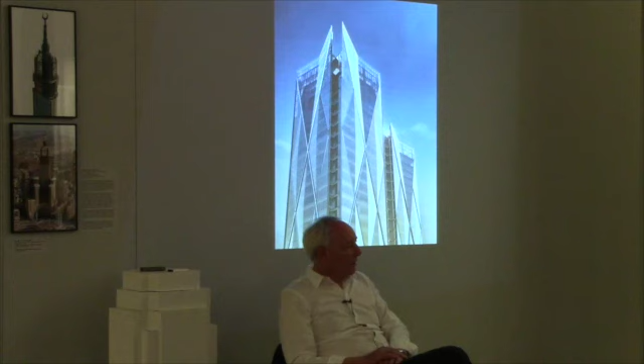When we started with just me, we were just doing bathroom extensions, as you do, that sort of thing, small projects, and it's gradually grown. So now there are 6 other shareholding directors, so there are 8 of us altogether, and about 200 people, mostly based in London, but we have an office in Hong Kong, which we're building up because we did quite a lot of work in China and the Far East. So that's the kind of background of WilkinsonEyre.

I thought I would just say a little bit more about the fact that all the projects are very different, and you will see this if you keep looking. This is because our approach to architecture is based on the specifics of the brief and the site. So we're very context based, and we don't have a formula, a style, if you like.

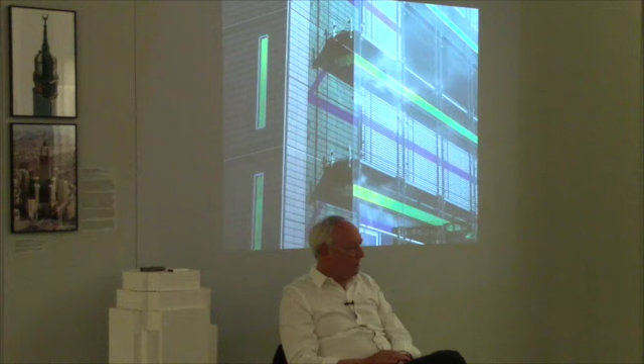We take each project as an opportunity to do something different, and we try to design appropriate buildings. So you'll see that there are bridges and commercial buildings mixed in with infrastructure projects.

And you'll also see some artworks here, which are my paintings. The reason I put those in is that I'm very keen on drawing and painting, it's very much a part of my life, and it affects the way I design buildings. So I like to put them in, I like to see them as part of the architecture.

There's one. Of course, they're not related, but actually the architecture influences the paintings rather than the other way around.

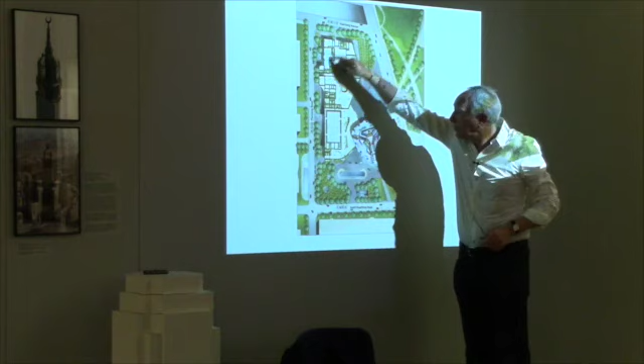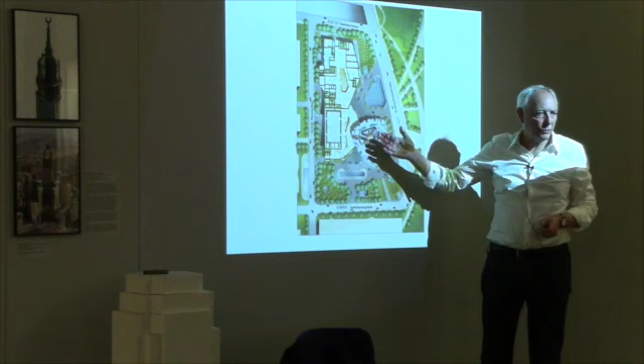It's 4.5 million square feet of accommodation, mixed accommodation. There's a tower in the centre, and there's a new underground route below the site with connections through into a shopping area here. This is actually a shopping mall, conference centre, and there's a service apartment building above here. So it's a mixed development with offices on the ground floor of the tower, about 1.5 million square feet of offices, and then a Four Seasons hotel above.

So it was an awful lot to do in a short period of time. You can see here how the tower is joined by a sort of glazed... well, actually this is the main shopping area, but this was a sort of public space which joined up all the activities. And you'll see here there's a helicopter landing pad on the roof.

And that was one of these smoke-filled rooms. One of the things in Guangzhou was everybody smoked. Everybody wore polo shirts. They all smoked and had two phones in their hands. So it's quite difficult smoking with two phones. And they were talking all the time on both phones. So, you know, the meetings were chaotic to say the least.

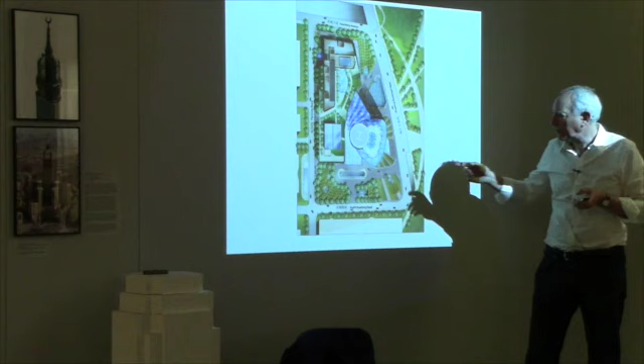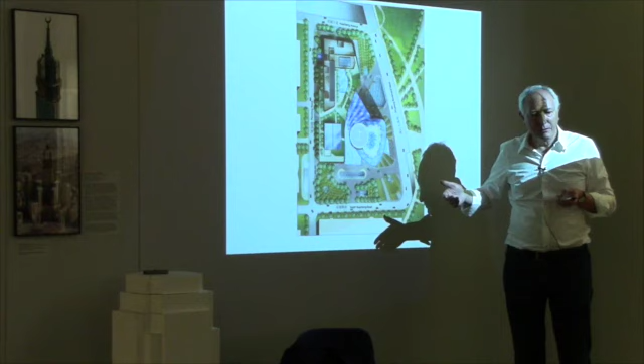But there was one meeting where the chief fire officer, who was quite an attractive woman in her mid-30s I would say, in uniform, was demanding what she wanted. One of the things she said was we had to have escape from the top and the bottom of the building, which meant, so we said, well, the only way we can do that is to put a helicopter landing pad on the roof. She said, yes, that's what I want.

So we said, well, what sort of helicopter do you have? Because it makes a difference. She said, we don't have any helicopters. But we'll get one. Anyway, she got her own way. And that meant there's no spire.

So working through, this was a very early drawing in my sketchbook, not beautiful, I'm not going to be published, but it was just a meeting we had with the engineers deciding how we were going to provide the structure. And we went for a diagrid structure, which is very stiff.

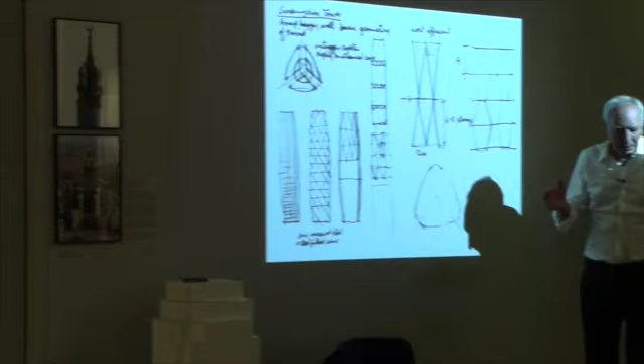The reason for that is, with an expensive hotel at the top, we were informed that people don't like to lie in bed when the building is moving around like this, because towers do move and it can be disconcerting.

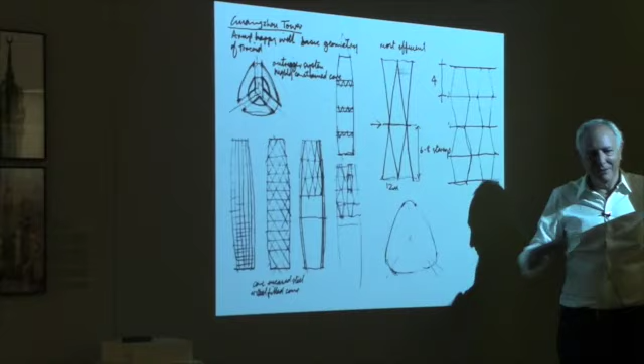So we got a very stiff structure, and I stayed on the 93rd floor when I was last there, and it was absolutely static. I couldn't feel any movement. I slept very well, so it worked.

You can see here that there were complications which came out of the simplicity. We wanted a building which was elegantly simple, and that's how we achieved it. It's actually a very big floor plate, but because it's so tall, it seems very slender, and we tried to get this sort of elegant simplicity.

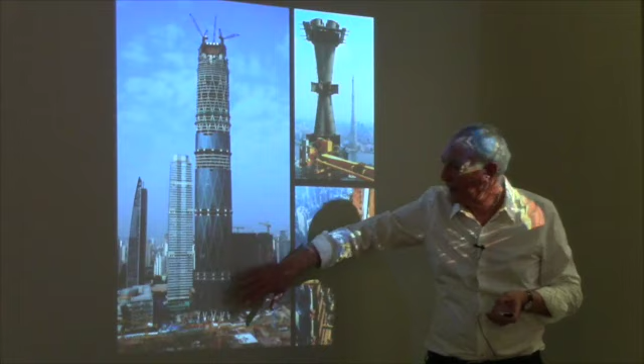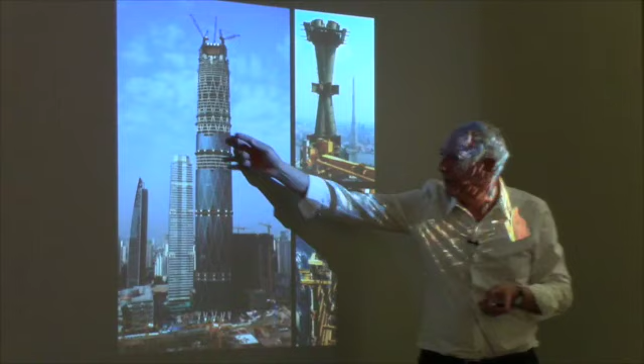So it's a triangular form, a curved triangle, and each facade has a radius designed to 5.1 kilometers, which was done visually and in modelling rather than deciding we would go for 5.1 kilometres. It's fattest down in the lower third and gets thinner as it goes up, where the hotel is, so you don't need so much depth, because you've got 1.5 million square feet of office in this space.

Just to look at the section, the lift core is enormous, although it's actually quite an efficient plan. There are 71 lifts in the building, which is something we couldn't imagine, but actually a lot of buildings have more than that. Because it's a mixed development, a lot of them share the same shafts.

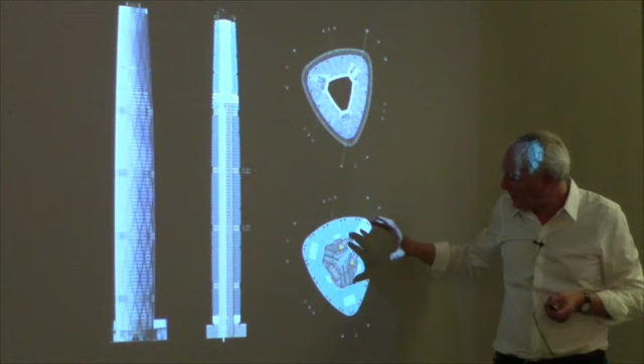So we had 6 high-speed, 9 high-speed double-decker lifts that go right up, and they stop off on these floors, and you change onto others. You all know about these things, but we didn't know a lot about this kind of thing, and we spent months getting this core as tight as we could.

And then, of course, on the upper level where the hotel is, the 70th floor is the reception area, and we have an open atrium.

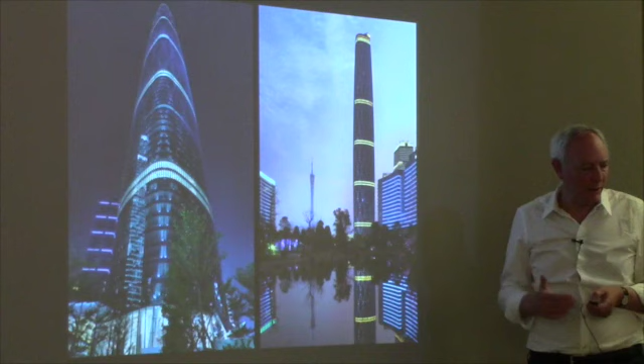So this is the building at night, and it's not exactly how we would have done the lighting, but there's a Chinese approach to lighting that's quite different. They like bright lights, and they like to light up the whole tower at night.

And this is the atrium I was talking about. The top 8 floors are glazed in for smoke reasons, and we made that into a sort of kaleidoscope so that we could collect the light and bring it down into the space. Then it's just an open atrium, with access to all the rooms at the lower level.

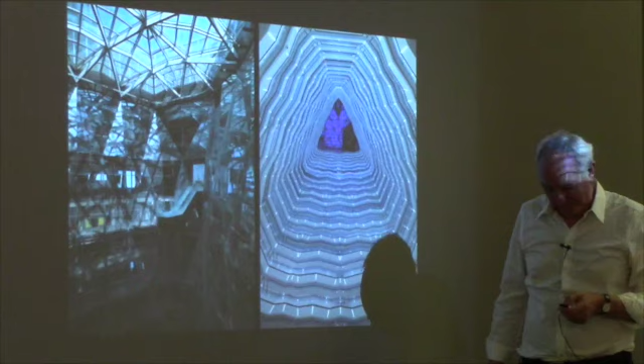And when you get down a little bit lower, there are 3 or 4 levels of restaurants and bars and those sorts of things that go in hotels, and then there are another 2 or 3 floors at the top of restaurants and bars. So it's very well serviced, and it's an exciting place because that atrium, 35 stories, is the same height as St Paul's Cathedral, including the dome.

So there's some room at the front if you'd like to come around. I don't know what the equivalent is in New York, but St Paul's always seems quite a tall building in London.

The 70th floor is open right across its face, so the lobby area opens out, and you've got these incredible views.

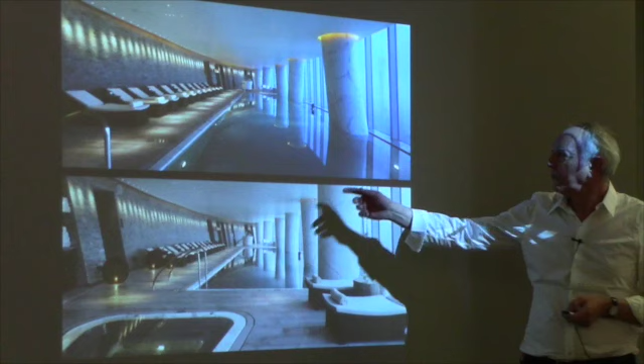And then, of course, there are all the other things like the swimming pool with a kind of infinity edge. But you're up on the 68th floor, I think. No, it must be the 73rd floor. Yep.

And that was our first tower, this sort of elegant simplicity, and it's been successful. They've let all the office space, and it's multi-let. It's a very typical Chinese way of doing things, where people take quite small sections of the plan, and it was all let very quickly.

And then the hotel, they're very happy with it. I saw one of the main board directors, the same person who said they've got to get rid of the columns in the rooms. They didn't want these big columns in the room, and I said, well, the building will fall down if you take the columns away. He now says people like the columns in their room. So they've adopted the columns because they're about 2 meters in diameter, so they're quite significant, having a big column in your room.

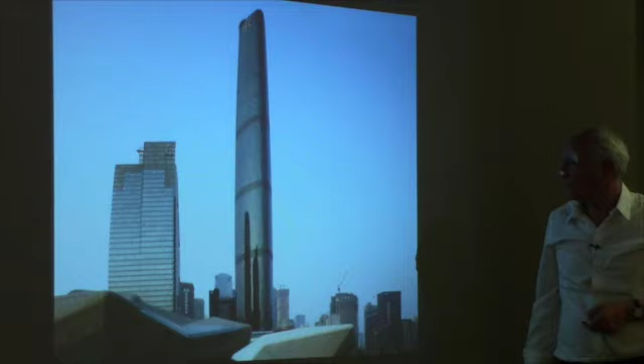Having done one tower, it's an entree to the club in a way, and that's what we thought anyway. It did get us on the list of various other tower competitions, but we didn't win, of course, because we were up against all the professional tower architects, except when we got to Crown Sydney.

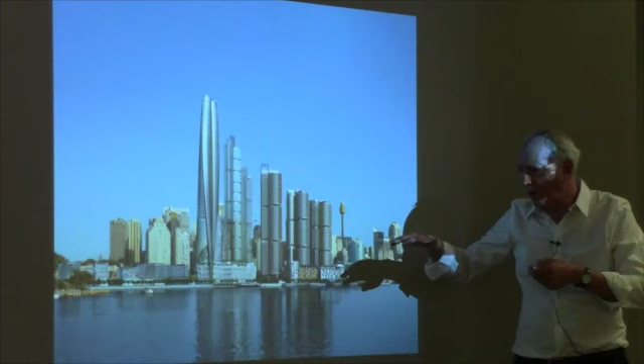Sydney is the main CBD behind here, and the city is sort of spread out a long way, but all the towers are in one main area. There are limits to how high you can go, which is 250 metres, and there's a line beyond here which is the Opera House - we weren't allowed to build beyond that. So this was a whole new redevelopment area. It was a container port before, a big slab of concrete.

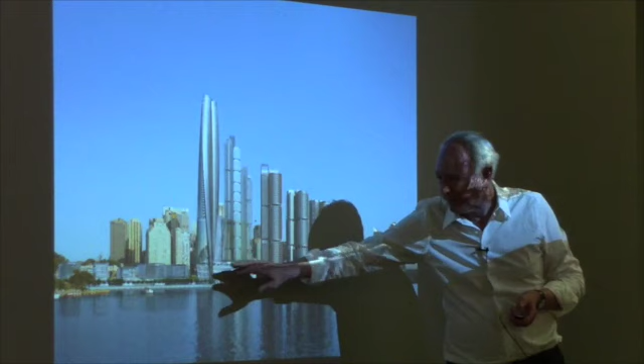Some years ago, Lend-Lease won the competition to develop it, master plan and develop it, and they had Richard Rogers Architects as the master planners. They're building these 3 buildings, and Renzo Piano is building these 2 buildings. We had to compete for this site, which was, in my opinion, the best site in Sydney.

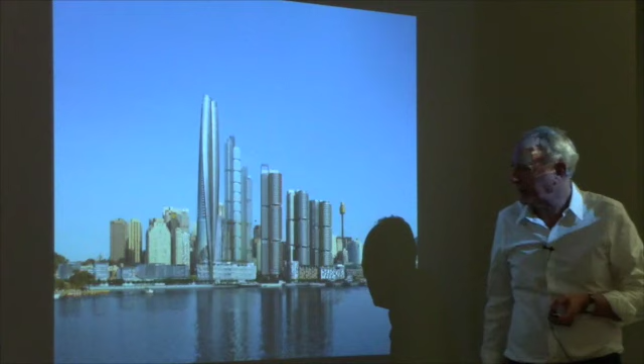You can see it goes higher than 250 metres. We were encouraged to push the limits, and we've gone up to 275, which is the maximum we can, which is about 70 floors. But it's a resort hotel with upper level apartments, very high quality apartments. And there's a big podium which has a casino and lots of - it's a resort hotel, so there are swimming pools everywhere, and there are bars and very expensive restaurants.

Being an international competition, one has to come up with something new. I mean, you can't win this sort of competition by throwing up a straight up and down tower. The brief came out actually on the last day before Christmas, and I grabbed this old wad of information, took it back, which was a nightmare really, because one likes to relax over Christmas. But there I was working through the brief.

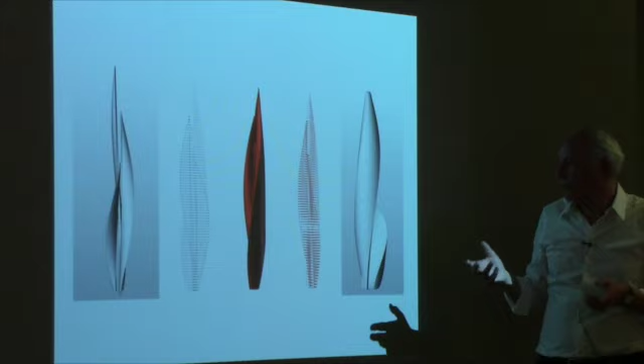So, starting with those sketches, we then started modelling it in 3D. And even just the first few models, the images coming from the model looked very exciting. I was really excited - I thought we were onto something here, so we went with it.

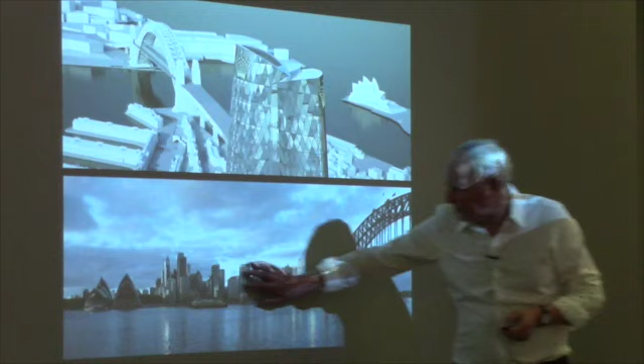And it's just placing it in Sydney. So you can see here the CBD, the Opera House, and the bridge, and this is the tall building. There are other buildings - we haven't shown those other buildings here. So it's a sort of high point, a landmark, if you like, in the corner. And the top of the building becomes really important - you can see here the 3 petals, how they finish at the top.

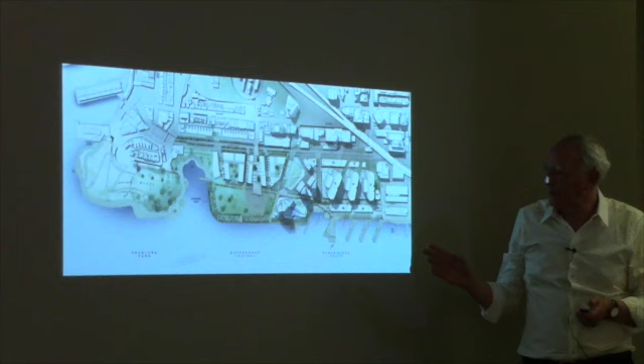Looking at the site, as I explained, this was just a big slab of concrete as a container port. Part of the brief was that 50% of the area of the whole site would be devoted to leisure activities and open space. The landscape architects and master planners - not us - resculptured the edge of this slab of concrete to bring it back to the way it was before, with the little creek.

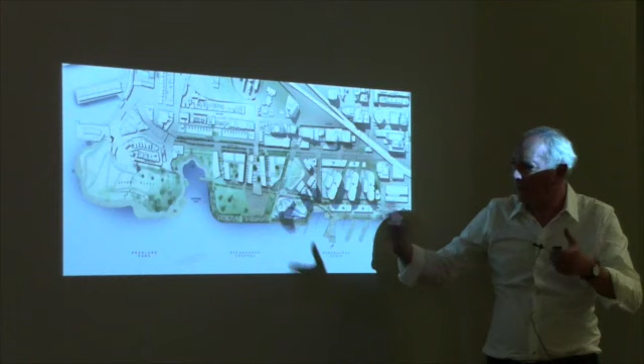And this is our site here, and these lines are the Richard Rogers master plan lines of how the development could take place - they're like fingers of high-rise development.

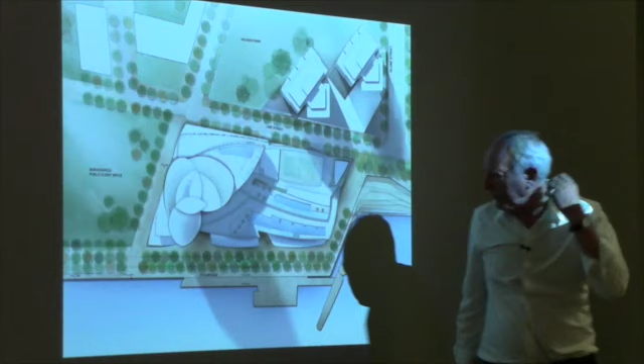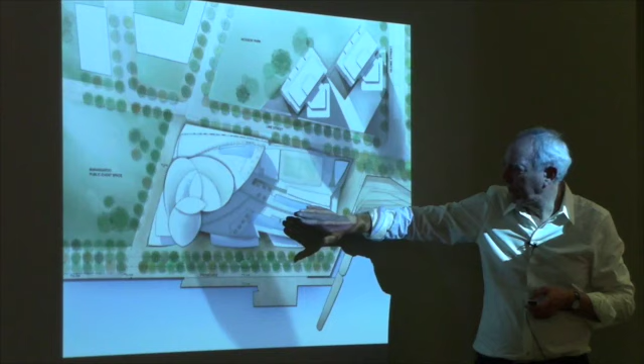Looking down on our building, you can begin to see how that piece of sculpture is really an inhabited sculpture. The 3 petals here, and a 4th petal is this one, which tails off to become the main hotel accommodation. This is the whole podium, which has these leisure activities at the top, with the casinos below.

And that's how it fits in. I don't know if you can see, it's not very good quality reproduction, but it is actually a very sculptural form, and it's twisting through 70 degrees.

At the lower level, we're on the waterfront, so these are some of the most expensive restaurants in Sydney. We must have spent weeks and months talking to the local authorities to convince them we could have these terraces onto the waterfront. They didn't want anything like that. Well, how can you not use the waterfront? Because our site boundary is this line here, and we had to take over the waterfront to get these cafes and restaurants and bars. So half of the space is open to the general public.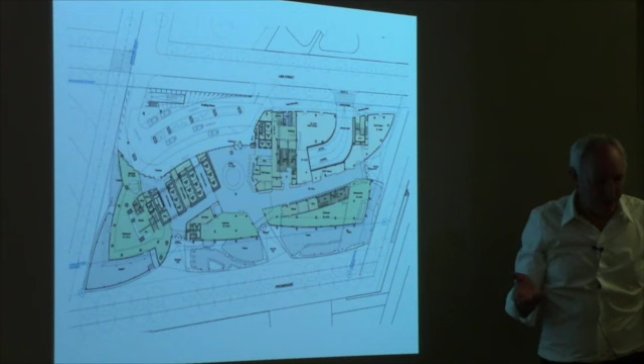The other half is rather expensive restaurants. But the whole thing about this hotel is there's no back to it. It's the main porte cochere, the entrance here. Every part of it has activities facing onto the street or onto the park on the waterfront. And you can go in, there are lots of different entrances, it's very porous. It was through ideas like this, which we developed in London, that we managed to convince the authorities that we could go ahead with such a big development.

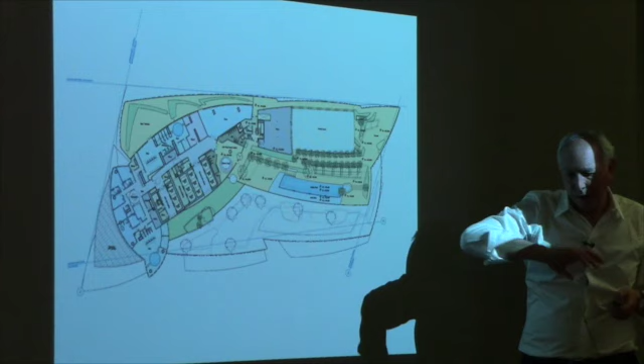And then as it goes up, the building changes, because it's not just reducing in size, it's twisting as well. This is the main hotel accommodation. There are a little over 20 floors of rooms, and they're fairly standard because we had a maximum and minimum size to work to.

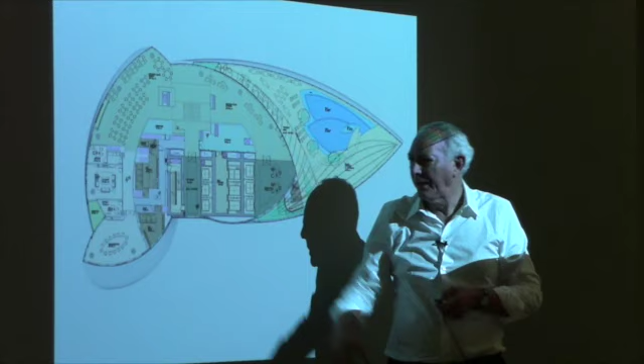And then that hotel part tails off with what they call the Crystal Club, which is the high rollers side of the hotel, for the people that come back every time. They get special facilities, and their own swimming pool at this level on the 24th floor with fantastic views.

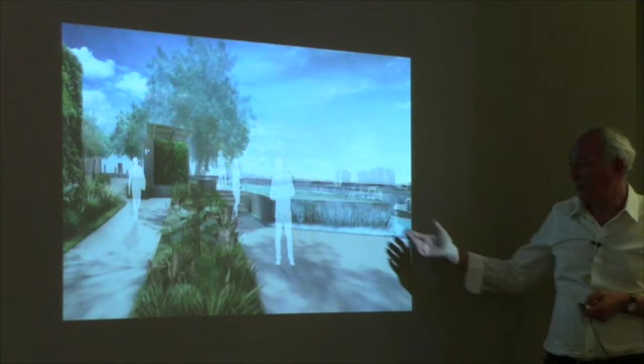This is the sort of design for one of the resort areas. And then as you go up, the building is changing, so every floor is different. And that can only work with the columns following the form.

It's quite complicated. I'm not sure there's ever been anything done quite like this, but there were some risks attached to this. When I talked to our client and explained what the risks were, they said, that's no problem, we're gamblers, that's what our job is, we take risks all the time, but I like it, and I'm prepared to take the risk.

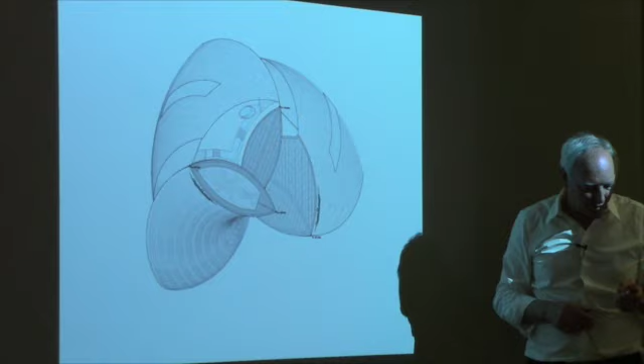So they've backed us all the way, and we've got no curved glass here, it's all flat glass. The only thing is it's going to be cold pressed into position, which we're reliably informed by various people is possible. So we're moving forward on that.

And the top 3 floors are pretty spectacular. I think they'll be the most expensive piece of real estate in Australia. We're talking sort of at least $100 million. Pretty nice place to live.

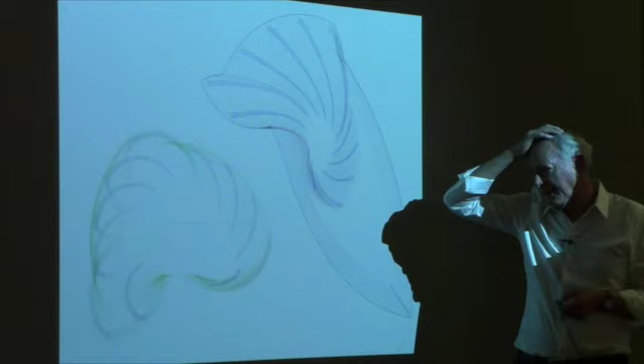And this is just an indication of the columns. They're not straight in any means, but this is the pattern they're following. And the core is vertical, so the core is providing the stability. It's got outriggers, but the outer columns take the curve.

And then on one side of the building, where we have more curvature, we've triangulated it, so that means we can do it without any curved glass. On the other side, we have a stepped system to take up the curvature. So it's floor to floor pane of glass, different lengths, so that we can get our solid panels where the partitions come across, so we can always accommodate the partition wherever it comes. These are kind of technical issues, but you can imagine that when you've got a building curving that way and going round and twisting, it creates a whole load of problems that you can't initially foresee.

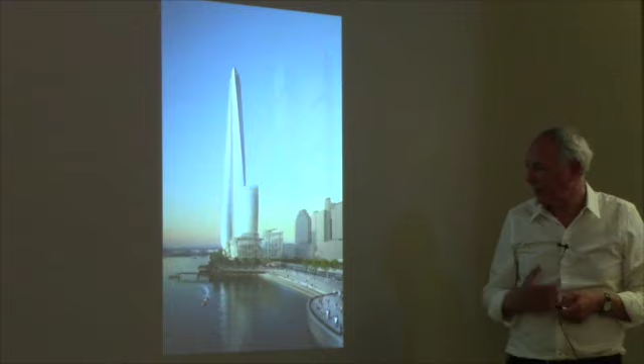So we have to solve those problems, and we've got past that stage now, we're on to tendering packages. And that's the view from the city of this kind of sculpture. What I called it in the interview, I called it an inhabited artwork, and they seem to be interested in that.

Then the question came up, and they said, well, it's a 6-star hotel, you can't just have glass, you've got to have some expensive materials. So for the podium, I said, well, I'll think about it. And I sent this sketch through to the client, which says laser cut white marble. And a note came back saying, yes, we like it. It looks expensive. It certainly will be.

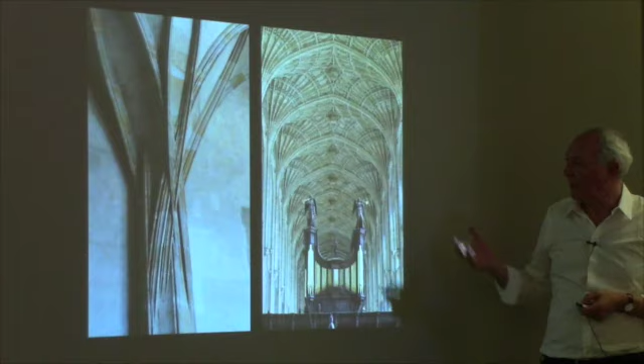It's going to be the only stone tracery, really the only Gothic stone tracery in Australia, and it can only be done in a very high-tech way. This is working again with Arup Australia, using an idea that Peter Rice had for tensioning up stone. You CNC cut the marble, Carrara marble, with a hole through it, and tension it up so the whole thing is held together. It's pretty new, fairly scary, but we got this full-size mock-up made, and when I was last in Australia they erected it for us, and it's pretty fantastic.

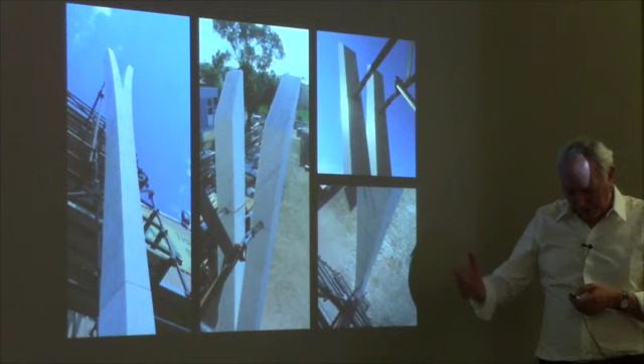This is how the CNC cutting of the stone elements works. In the old days, you wonder how on earth they could have made stone traceries with hammer and chisel. But this is how we're doing it, and these are the points where the steel tension was going—it's pretty exciting. I've not seen a client so excited, apart from the fact that we're a bit worried about the cost of it.

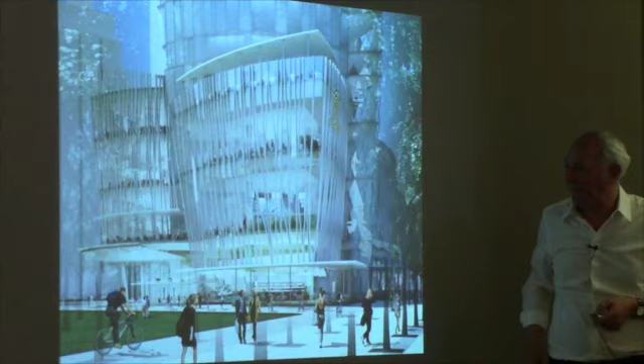But this is what you get: a veil, what we call a veil. They're mostly terraces around the building, and there's this marble veil, which is not regular—it's kind of slightly informal. There are repetitions, but it's an informal stone veil, and it gives it a particular sort of character and identity, which is what we want.

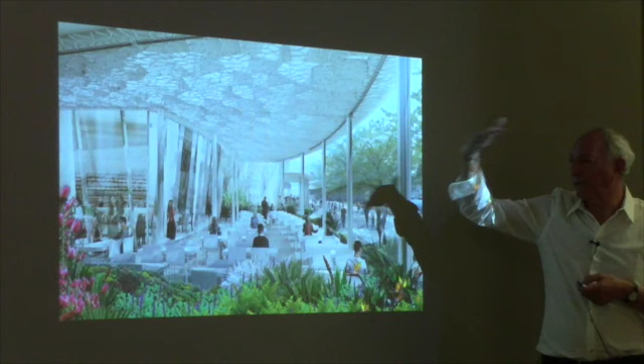And then there are the cafes on the waterfront I talked about. We've got a pretty unusual system for the roofs of those, using a Voronoi geometry with a glazed top and a variety of different underneath surfaces to provide the different kinds of space that we have. But it's still pretty exciting.

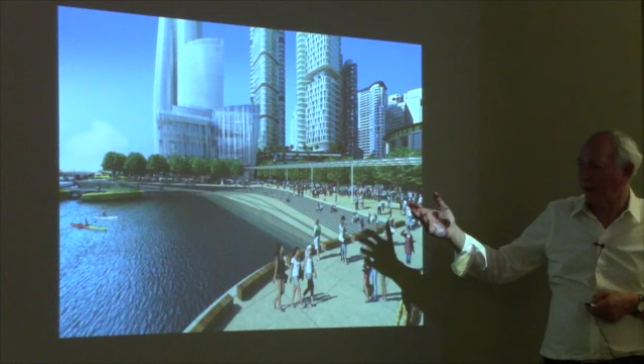And we finish there. I'm just going to have a quick drink before I move on to the next one.

So how are we doing? Have I got to speed up? A little bit. Yeah, okay.

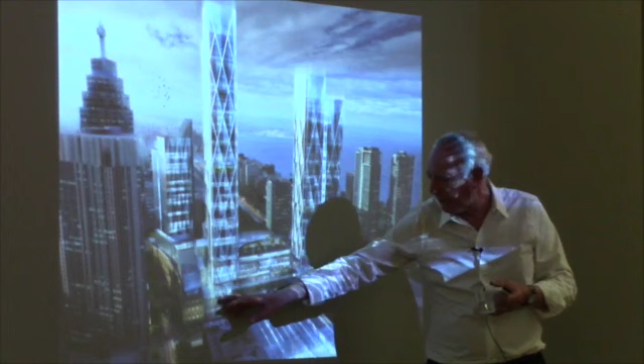So there was a very good opportunity to jump over this barrier, because this is Bay Street, and Bay Street is the main financial street in Toronto. So it seemed perfectly natural to us that you could build over the railway and put a block on either side, making that connection through to the main CBD. People coming down Bay Street could easily go up over the railway or under it. We make connections both ways, with cafes and restaurants on either side. It seemed perfectly reasonable to us, and that's what the client wants to do.

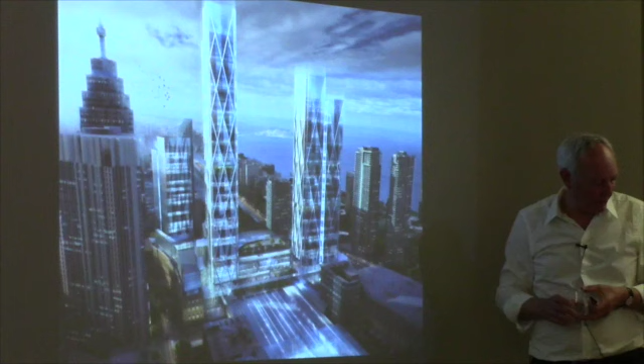So here, they said they didn't want any curves or anything complicated. It has to be a very simple building, but they want something special. Now, for an architect, it's like having your hands held behind your back, but it's still possible.

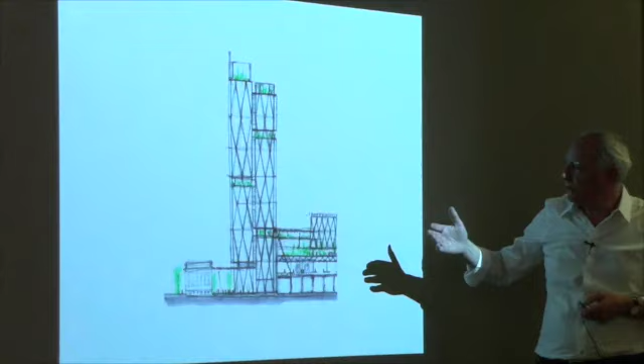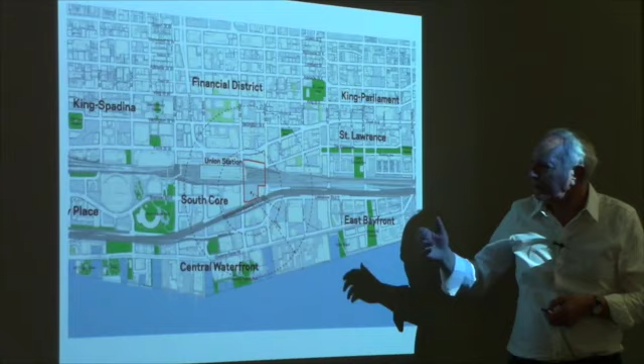So we came up with this idea—it's a sort of triangulated system. It's not quite like the first building I showed; it's not structural, but it's a triangulated cladding system, pyramidal. This is the sort of sketch of the triangulations, and the model showing how it's fairly simple glazing, but it catches the light in an interesting way.

So the whole point of these: when you angle a plane of glass, and if you have different angles, each facet will catch the light in a different way. And you'll see this from all over the city, so it's not just a one-off thing. Wherever the sun is, it's going to catch the glass, and it lightens the whole place up, giving it a very special look.

And it didn't take us much to convince the client of this, just making the model and shining the light on it. So that's part of it. It's more complicated, let's face it—you've got facets you have to deal with. But what you're getting back is something special, and it's a building which they can let.

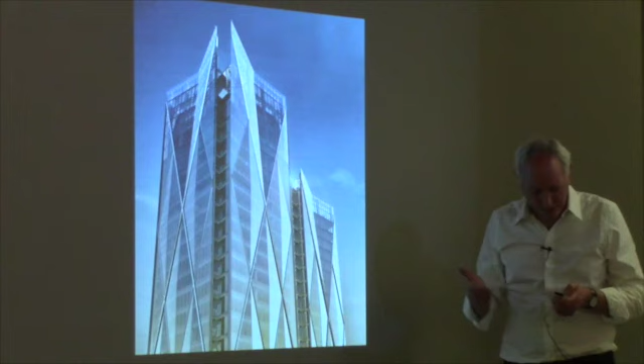They're looking for a big bank to take it.

There's this point about where architecture can actually pay for itself by giving something a little bit different. You make it special, and therefore you can get more rental, and you're more likely to let it. So that's the way we were working.

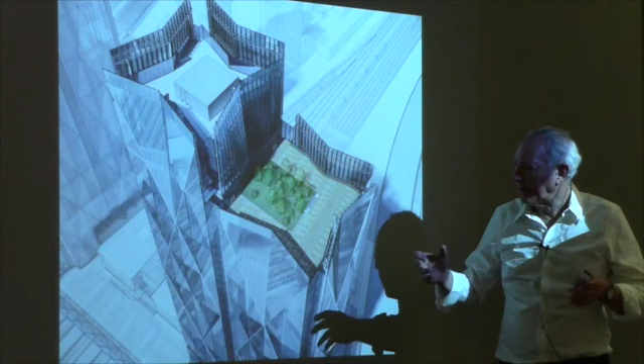At the top, we've had a lot of schemes for the top, and it's been kind of softened down a bit. We still have this kind of crenellated space at the top, and part of it is plant, and part of it is accessible, sort of high-level meeting rooms and so on.

And then, of course, at the lower level, we were trying to provide a good entrance lobby and attracting people. Remember, we've got to get people from underneath the railway or over the top of the railway to this space, and they can come in at the high level or the low level.

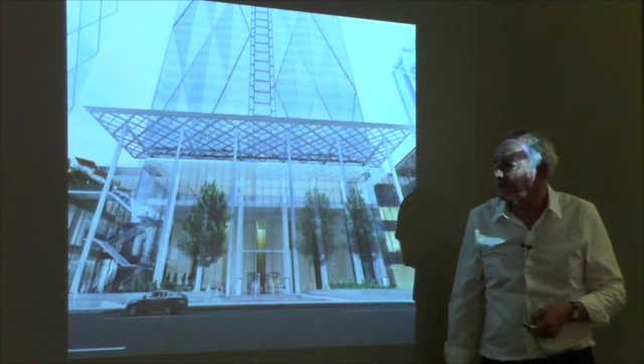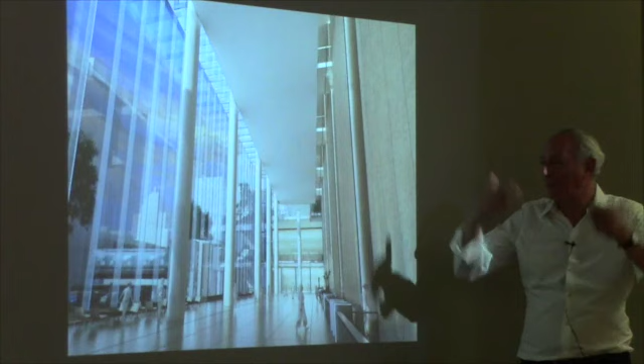And the process has been going on. It takes a long time. Everything has to be reviewed in several countries and costed. And it's the whole process, but it's going well. And that's what keeps everyone going. I mean, quite often you've got to cut something, you've got to make it simpler, and then they come back and say, no, we're going with it, we're staying with it, we're going to spend the money.

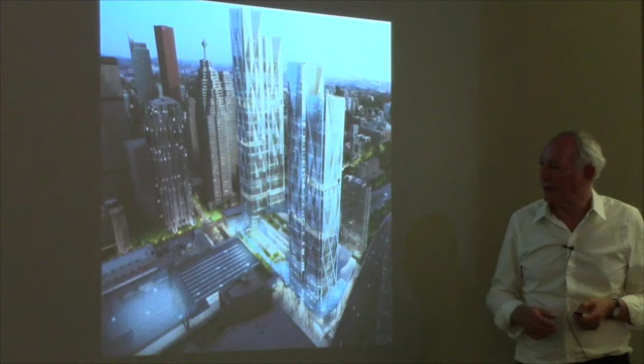Because they want this sparkling look. And actually the rest of the city is fairly, the best towers are the Mies van der Rohe towers there, and they're black glass and black bronze, but the rest of them are fairly ordinary and fairly simple.

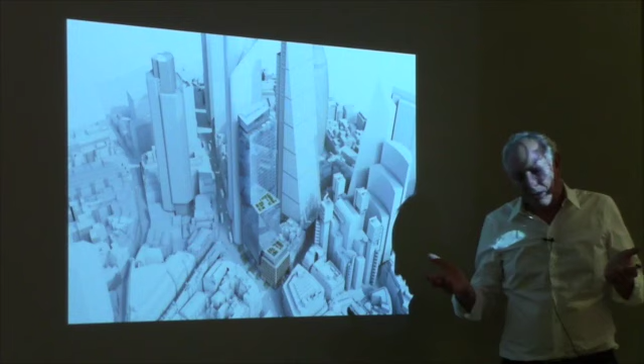So just going on to our last one, which is in my hometown, London. And London is probably the most difficult place in the world to build because we have incredibly difficult planning constraints. And it's mainly because it's a historic city, and some of these buildings in the centre of the city actually go back hundreds of years, and the planning process has sort of developed over the years. So it's very difficult to build anything, actually.

But when something gets built, like this is the Rogers Stirk Harbour cheese grater, it's called. They had no end of trouble building this. It took years to get the consent, but now they got the consent, they built it. We then had to fit in to this, so we couldn't actually block any views of the cheese grater, believe it or not, even though they fought tooth and nail not to build this. Once it was built, they said, right, you can't build, you mustn't have a building that goes into this space, into the triangle space.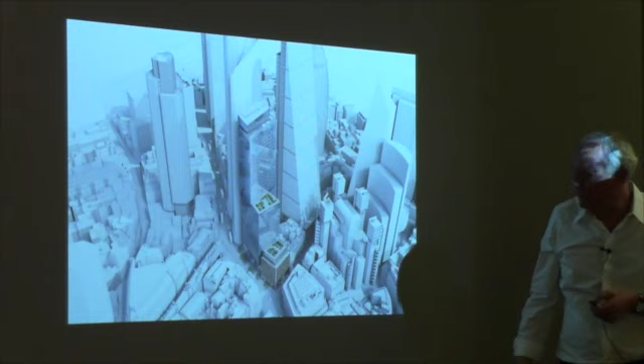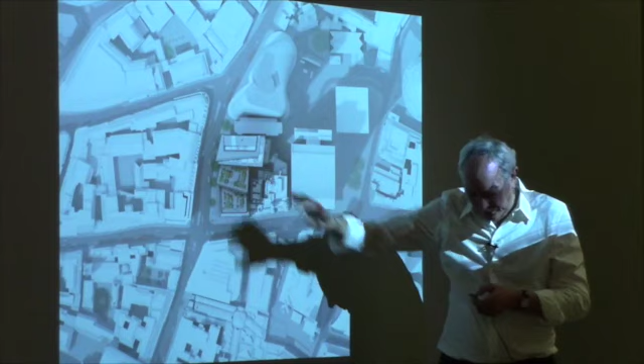So what happens is you work through a series. I think we had 6 or 8 meetings with the chief planning officer, just talking about what we could do and how far we could push it, what we couldn't do, and being slapped on the wrist each time. And gradually we got what we think is the maximum we could get out of the site, with a tower which is long and thin here, which sits on, they're stacked, so it sits on another tower.

And at the lower levels you get a bigger open space, which can be divided. We've got two entrances, one on Leadenhall Street and one on Bishopsgate. You wouldn't know Leadenhall Street is the insurance market for the world. Lloyd's is just here. So you can always let the space to insurance brokers, but they're lazy, they don't like walking very far. So you have to be within 5 minutes walk of Lloyd's. All the insurance companies are within 5 minutes walk of Lloyd's, so they won't go any further along. And so they have to have an entrance here, and then you have to have brokers' lounges for them.

They have these spaces where they chat to each other. That's what they say they're working, but it looks to me like they're just sort of resting. And it's quite complicated.

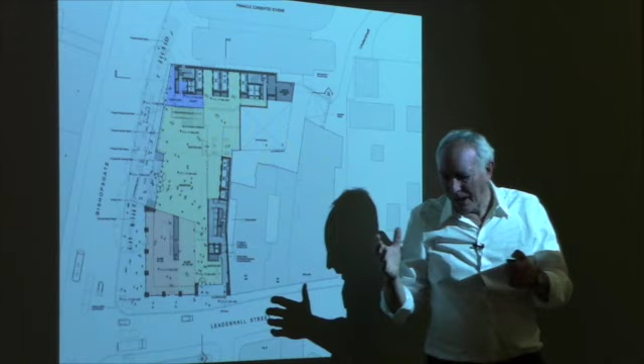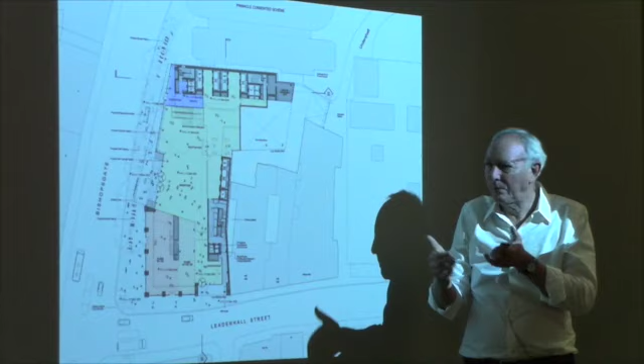But we're also reckoning that when the tower is narrow, the top part of it, actually this will be let to hedge fund managers and people like that. So the rental you can get for a small floor high up in the centre of London is phenomenal. We're talking possibly £200 a square foot, just because they don't want a lot of space, but they're prepared to pay anything for the right space.

Obviously, the brokers won't pay that. They have bigger spaces. So in some ways, having a building which isn't just straight up and down is actually a benefit. Well, that's the way it seems to be working out. Our clients at Mitsubishi do a lot of research, and that's the way they're feeling about it.

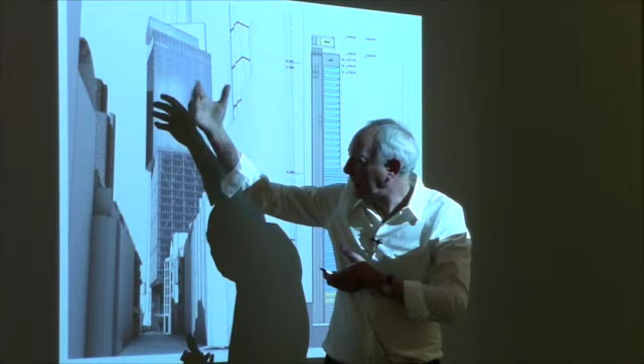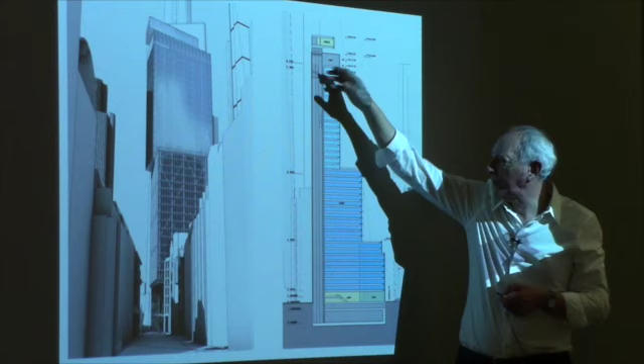So this is how it works, with one building sort of stacked on another building which has a much larger floor plate, and it gets bigger at the lower level. This can all be let to one place. It's a side core because we have another building along the side, so there's no view on this side, so we've made it a side core, and it steps out. And where it steps, you get very nice terraces overlooking St Paul's Cathedral.

We tried to make each stack different. The upper level stack is a 3 metre wide cladding system, and it's clear, triple glazed, so it can have clear glass, and it's very crystalline. The next stack has a much closer spacing, a 1.5 metre module, which is 5 foot in your terms, and the structure is expressed. Then on the lower bit on the corner, it's a stone cladding to tie in with the historic buildings here.

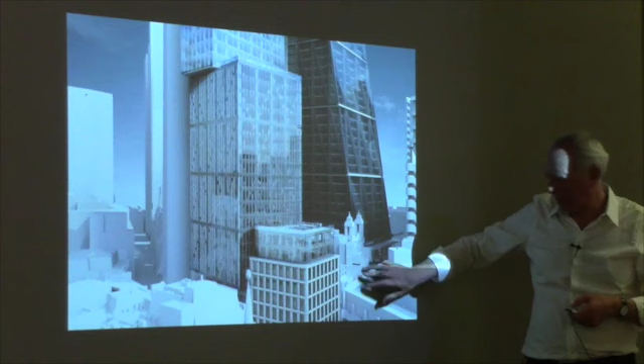So this is the Cheese Grater. This is what's known as the Pinnacle, which is being redesigned at the moment. That was the KPF building originally designed, and we have to somehow fit in between these two buildings on the corner.

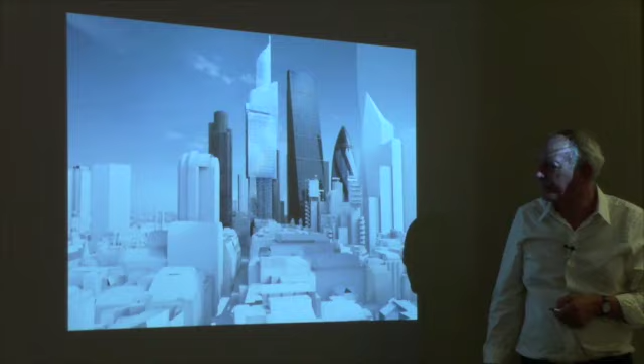This is the corner of Leadenhall Street, which really is the gateway into the city. The kind of views we end up producing, I don't know how it works in New York, but we end up doing something like 50 views to show what it's going to be like in every part of town, and how it affects the skyline and views from and to St Paul's. It's a process we're all used to, but anyone else coming into it would think we're all raving mad.

On the top, the planning officers insist on having public space, so we put a pavilion on top, expressed as an item because it has to be raised above the plant rooms. There are 2 floors of plant rooms here, raised up. We can only justify this by providing some extra space for the tenants, so there's conference facilities on the top floor.

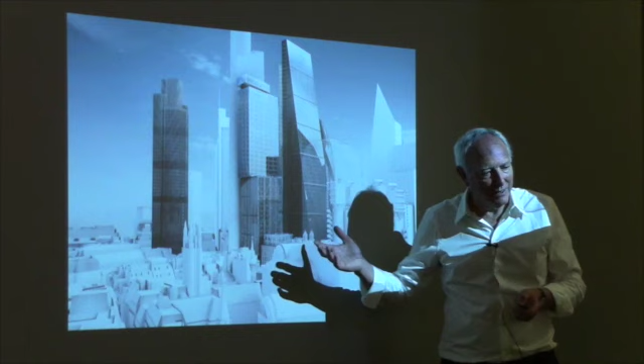This is the way that we do it. We put in the planning application. We wouldn't put the application in if we didn't know that we were going to get consent. How long it will take, I don't know. But all these things are based on a program for vacancy of the buildings on the site.

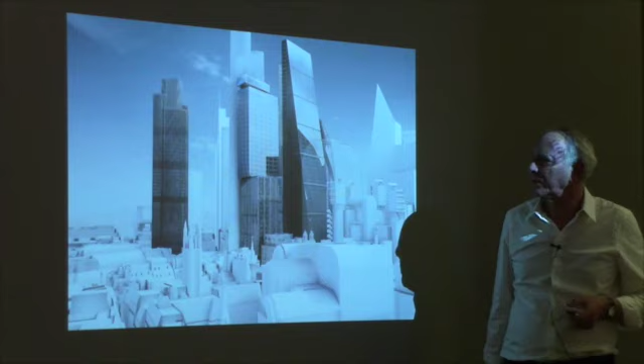So as soon as it becomes vacant, they want to start the demolitions. They want to be able to start lining up the contractors and get on site as soon as possible because they'll try and pre-let it. But that's what building in London is all about. And that's why actually we London architects don't mind travelling, because we think it's going to be a nice holiday period.

Although in Toronto, it wasn't the planners that were difficult. Planners were very friendly. It's actually the client's advisory consultancy system that's really constrained what we can do, which is fine because they're representing the client and the client's paying for it. But they have very strict ideas of how things should be.

And I guess I could just wrap up with this idea that architecture can add value. But it sometimes might cost a little bit more. But there's a series of choices, so we can always design to a budget, and we do design to a budget.

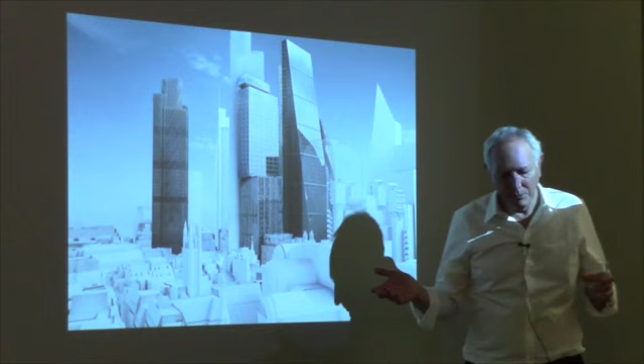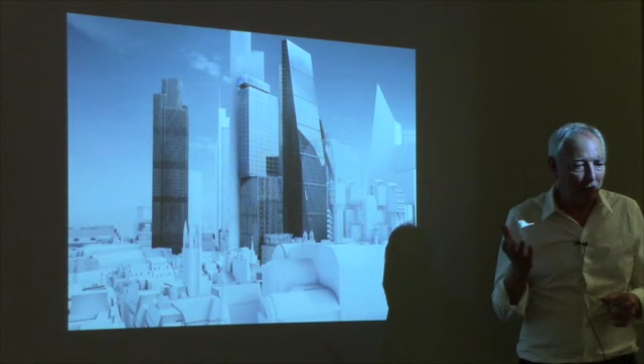It's like when you go looking through car brochures, you always want the cars a little bit more than you can afford, and then you try and get them. If you can't, you get the next model down. It's the same with architecture. We like to work through the process of going for the dream, starting with the dream and working backwards, rather than starting from the base design and working upwards. I think that's where I'd like to end: we start with the dream and work from there. Thank you.

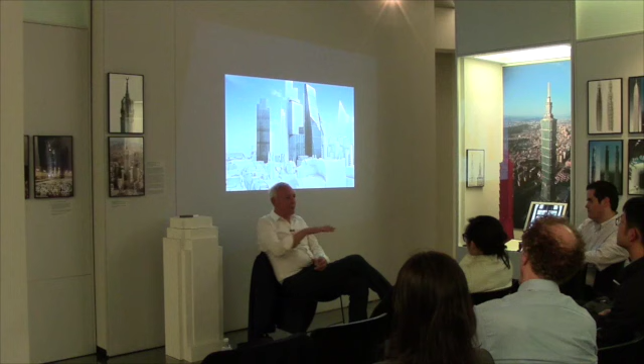You can see the different sites—I've shown you four different buildings on different sites. The first one I showed, there was nothing there because it was a new part of the city. Now if you look at it, it's all towers because there wasn't much for context. The only thing one could work on was the skyline for the whole city, and the fact that we had the river nearby, which was kind of a stop to the development. So we were the last of the towers, as it were.

In London, there really is a context because we've got the historic buildings and the new buildings, and Lloyd's and all those—it's very full of heritage, so it's complex.

In Toronto, they have a CBD that's full of fairly straightforward towers, and they're happy—they're not worried about height. They're just concerned that maybe if one could actually stretch the CBD over the railway lines, that would benefit a lot of people. So they were generally in favour of it, and we were interested. The process we had to go through was to think how can you do this—how can you get people to cross the railway or go under the railway with the park? We started off with a shopping centre above the railway line, but it wasn't feasible. You could get to the shops there, but it wouldn't let for enough money to make it worthwhile to build. So it's a combination of things that affect the project.